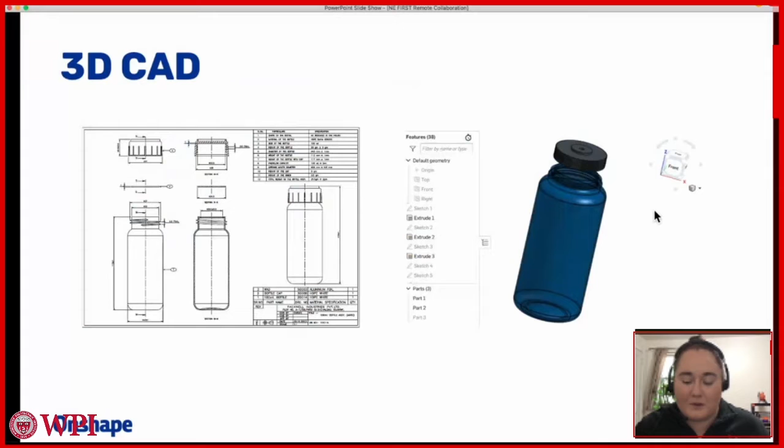So really why I think it's going to be so critical this season especially is just, it's going to really help you be more efficient with your time and your resources.

I've definitely heard this saying more than once: measure twice, cut once. So the more that you can measure and check things out and make sure it'll work before you start fabricating and cutting stock or whatever else you need to do, the better off you're going to be, because you're probably not going to have to rebuild something again later.

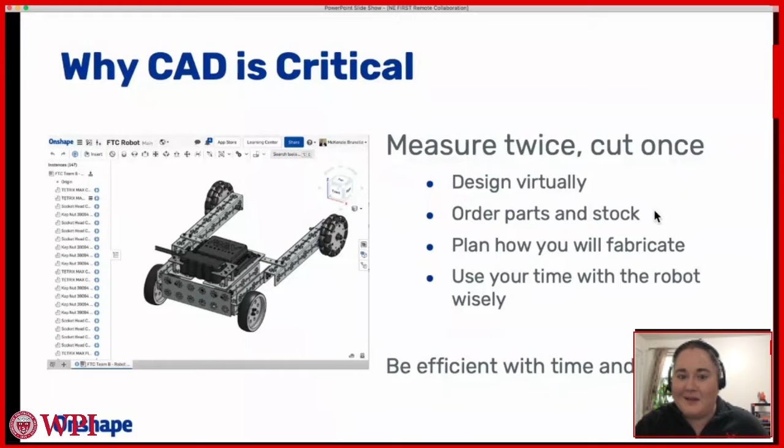So if you can design virtually, maybe if you have to start out the year where you aren't all in person together, you can be ordering the parts and stock and coming up with a plan for how you're actually going to go through your robot fabrication when the time comes. Maybe only a few people could be there in person, or if the whole team can be there, you can just be more efficient and know what you're going to do if you do some of that design up front. I think this year it's just such a different situation, that I think it's the perfect time to actually be working with CAD and start getting into those skills.

But again, I do recognize that CAD can be really difficult for a lot of teams, if not impossible, depending on what you have for hardware. Like I said, I didn't do CAD when I was on a team, because my school provided Macs to us, and I just never had the opportunity to do CAD on a computer. I just didn't have a computer that could run it.

And for our team, you're already spending so much money to travel and go all these places, to go to championship and everything else that's happening. So spending money on CAD laptops for students - maybe you get a couple kids a CAD laptop, or you have a couple computers in the lab at school or something like that. It's still not something that most people on the team can do. It's just so hard to get everyone able to do it.

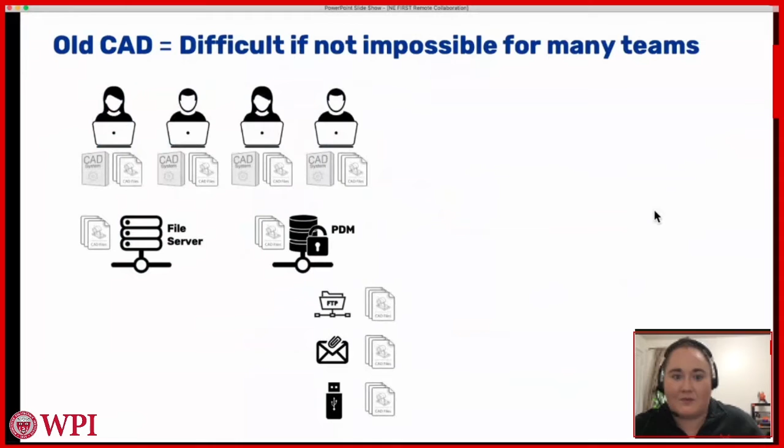And so even if you get CAD and you all have your own computer with CAD installed, and then you have all your files that you're trying to send back and forth - maybe you use GrabCAD, or Google Docs or Google Drive to send things back and forth - you still end up with all of these systems that you're trying to run and get everyone set up on, with different hardware problems.

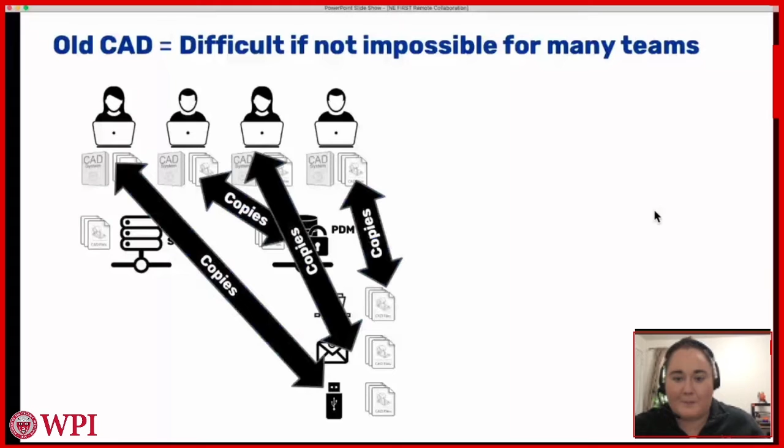If you have Chromebooks, if that's what your school gives you, you just can't do it when you're at home. And you end up, when you have files, having all of these copies everywhere. Do you have the latest copy? Or, oh, I had this really cool design last night and I redid this, but the person over here didn't account for that, so they've been designing with the initial plan. It gets kind of hindering for your team if you're just sending all these copies back and forth and trying to understand what the files are and where they are and getting people up to speed.

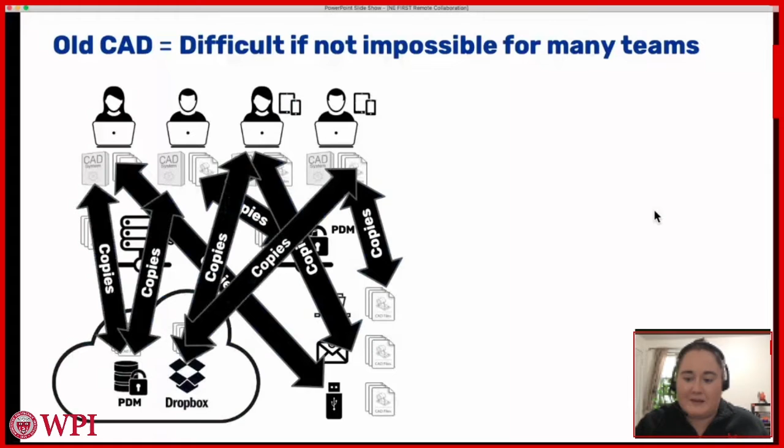You have to email someone to get your team licenses in a lot of cases. There's just all of these problems that teams can really face that make it not possible to do CAD. Going forward, Onshape really is going to make it so that more teams have access and can be doing it. So it's not just a couple kids or no one on the team doing it, but every single person can have access to what the team is doing and be collaborating remotely this year.

So I like to put up this quote. Jon Hirschtick actually initially founded SolidWorks, and then he left SolidWorks, I think about 7 or so years ago, to found Onshape. One of the things he's really proud of is that we designed Onshape to get technology out of the way of learning. We're really trying to make it so that all of those problems don't hinder your team, so this year you should be able to collaborate and work together without having to face a lot of those problems.

So what is different about Onshape that's really going to help your team this season especially? It runs in a browser, so you can use it on Chrome, Safari, or whatever else you use, not Internet Explorer or those older browsers, but any modern browser. So you can use a PC, a Mac, a Chromebook, whatever your school gives you.

So there's no download or installation. You don't have to reach out to me for a license file. You can just get started on your own.

You can also download an iPad app or a phone app, Android, whatever you want to have it on, which is really nice, especially when you're at your build space. Say you've done your CAD and then you're going to cut or manufacture something some other way. You can actually be pulling it up on your phone to double check something before you cut, or if you think there's something you might want to change, you can be looking at it on your phone or your iPad, which is really helpful.

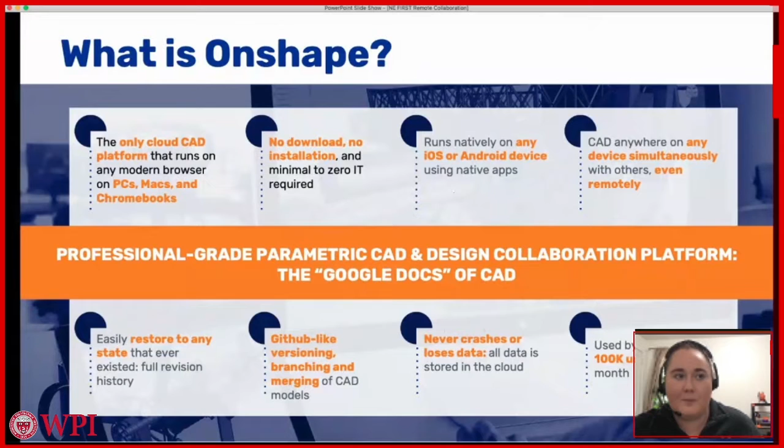And it's also really rapidly growing, so there are more and more professional users using it constantly. It's really a great skill to develop as you think about your future career.

And so now I'm going to go into Onshape to show you a few of the things that I think are most important and most critical for FIRST teams.

To get started inside of Onshape, all you have to do is go to onshape.com/education plan and sign up. If you're a student or a mentor, you can sign up here and get access instantly. It'll just send you an email to verify your account and you're ready to go. So there's no waiting on us or trying to figure things out. You can get access pretty immediately.

When you get inside of Onshape, it again feels a lot like Google Docs. You can have everything organized in folders. You can also create a team, which is a really great way to quickly share information out with everyone you need to on your team.

For your team, there's a couple things I'd recommend setting up. One is, if you do FTC or any FTC design, if you email first@ptc.com, you can get added to a team that has all of the different common FTC parts. Team 2901 created this and they've been sharing it out with everyone. Not everything from all of these manufacturers is in there, but they have a lot of different parts from a lot of the different FIRST suppliers. So this will be a really quick way to insert parts or the COTS parts that you're buying and adding to your robot.

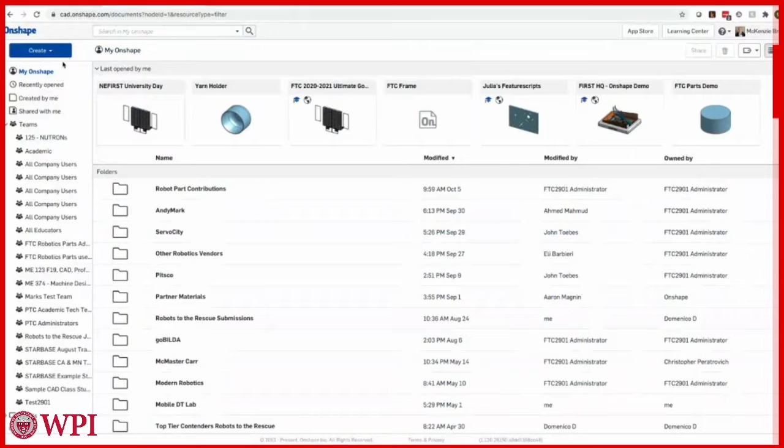So inside of Onshape, there are no files. Files are a thing of the past, we aren't using those anymore. Instead, there's what's called a document.

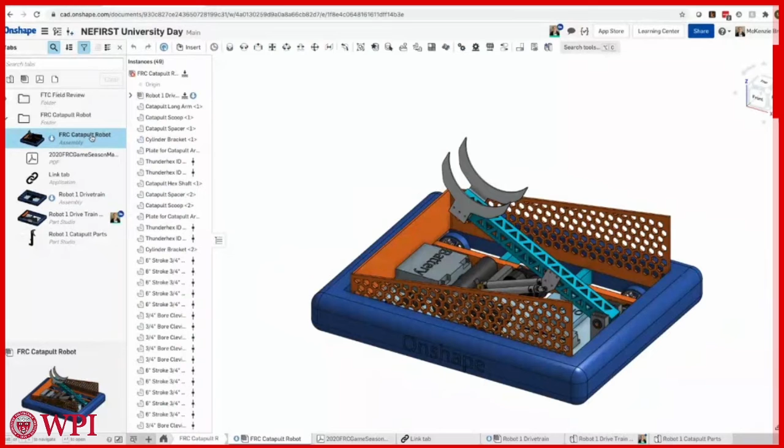Inside each document, there are a bunch of different tabs. There are tabs that are part studios, where you can make a whole bunch of different parts, and you can also have your assemblies as a tab inside one document. If you end up with a ton of tabs in one document, it can get a little slower to load, so I'd recommend no more than about 40 tabs in a document, but you can still do a lot inside of one.

And you can insert things from other documents. Say you think it's easier for your team to have a sub-team working inside of one document — you could have a document that's your full robot, and a document for the drivetrain, or however you think is easiest to organize yourself.

Here I can click share, and share to individuals on my team. Maybe I'm working on something with just a couple people before sharing with the broader team. You can make a team that is your entire team or your sub-teams, so you can share with multiple people at once and not have to remember to copy and paste everyone's emails every time.

You can also make documents public, which is something I really encourage teams to do to act as a resource and help for other teams. If you make your document public, someone could search for it later on. It's just another great way to collaborate within FIRST and to have that cooperation that we always like to see teams doing.

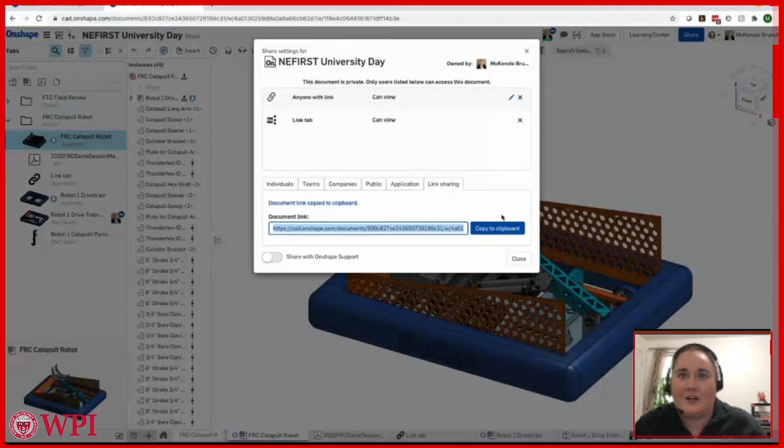You can also turn on link sharing. This is a great way if you wanted to send your CAD off to a sponsor, or to the parents on your team, or someone else you want to show — maybe your school board or your principal. You can turn on link sharing and they don't even need to make an Onshape account; they can just get that link, copy it to their clipboard, and go right to that document. They won't be able to edit it if they don't have an Onshape account, but they can still go in and view everything and see what you've been working on. It's a really great way to share your work and show the world what you've done this past season.

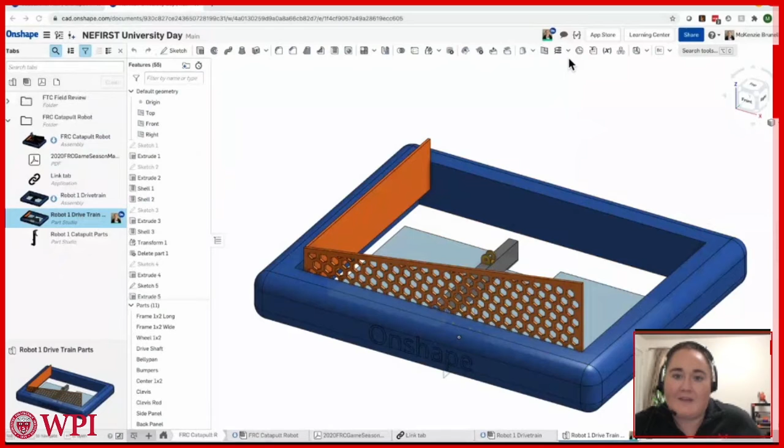Another great feature, especially for this season, is for when you're working with multiple people. You can see that I am signed into this document twice, and you can see my face up there. If you have more than one person working on CAD at the same time, maybe you want to do a design review or just talk about the CAD, work on it, or see what they're doing — maybe you're a mentor checking out what others on your team are doing — you can double click on their picture, name, or initials up here.

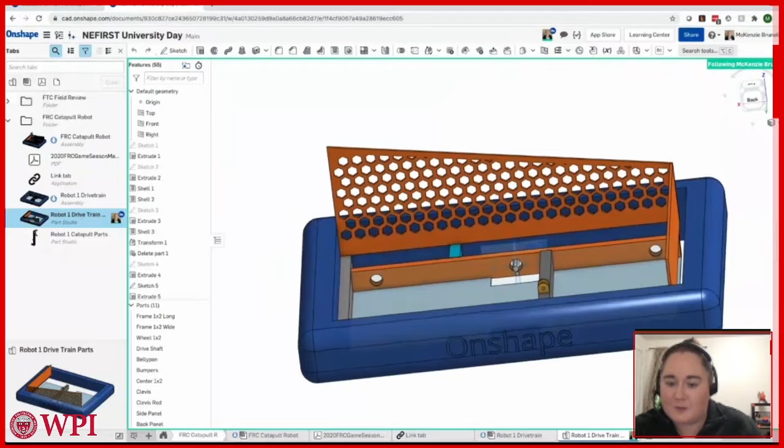So I'm going to move the model on the bottom screen, and as the other person is doing work, you can actually see what they're doing and be in follow mode. If I want to zoom in on something and see what's going on, I can do that and be following along with what that person's doing. It's a really great way to work together and collaborate.

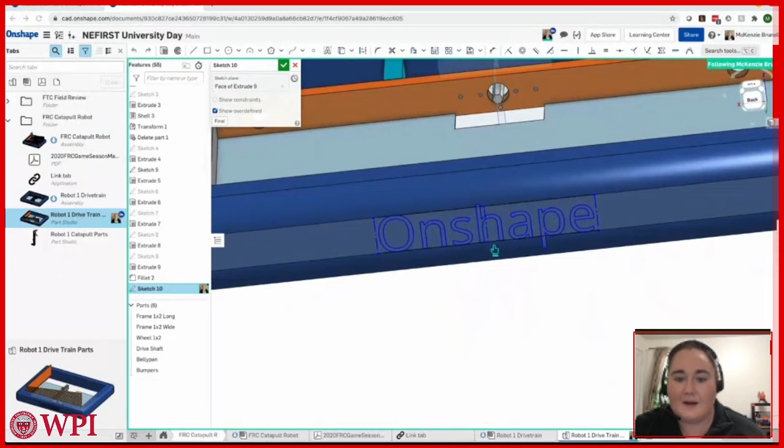If I'm working on a sketch, let me see — I can edit this sketch, and then I can see what that person is doing as they're making those edits. It's a really great way to work remotely when you can't be in the same room seeing what someone's doing.

Comments are also another great feature that are going to be really critical for teams this year. If you click on the comments button up here, maybe I wanted to tag myself to review something, or if you want to ask a mentor, can you look this over before we actually fabricate it?

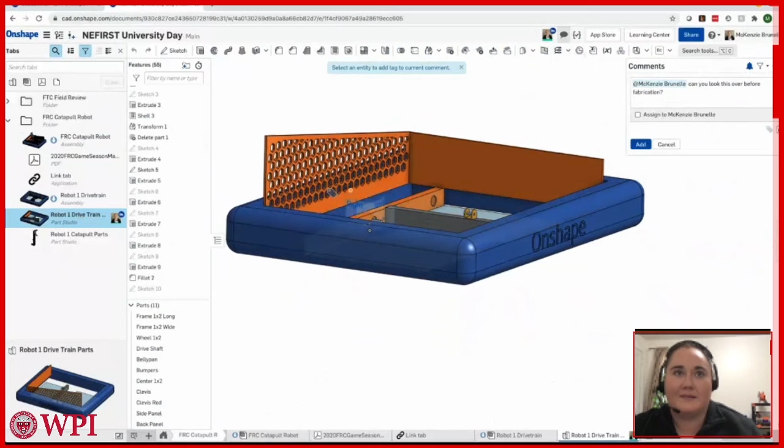So I can actually also tag which part I'm talking about, because that's kind of a broad thing to say. Maybe I want them to look over this part right here. So I've added that little tag there, and I can add the comment.

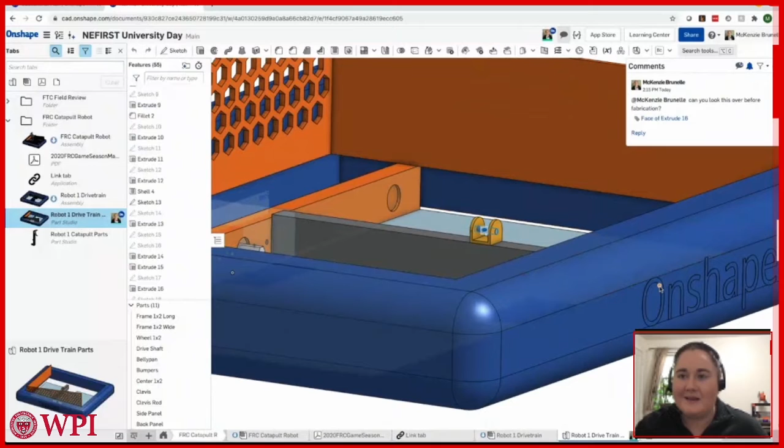And if you're like me and have Onshape installed on your phone or your tablet or wherever else, you'll get a whole bunch of notifications there too. So maybe if you're walking around the build space or somewhere else, you can take a quick look on your phone and see, oh hey, I got this notification. Maybe I should check out what they're doing. It can be a lot more mobile when you're actually working and doing design that way.

So again, it's easier to see what people are talking about if you aren't doing things at the same time. If we aren't having the traditional meetings like teams tend to do, it's going to be really important to have these other ways of communicating and working together. Comments are going to be a really helpful way this season to be talking with other people on your team and letting them know what you're doing.

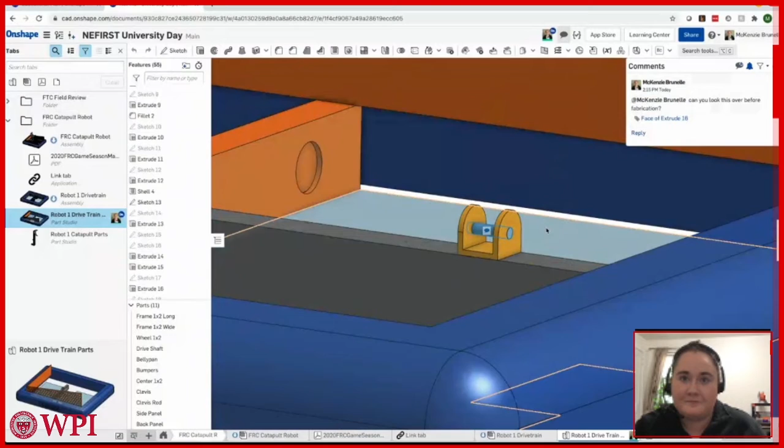Another thing that's really helpful as you go through is you don't just have to have parts and assemblies inside of your Onshape document. You can also upload PDFs. In this example, I put in the game manual. So if you wanted to have the game manual uploaded, you could do that, so you could be quickly referring to it instead of having to go find it somewhere else. You can just stick it right inside of your Onshape document.

You can also use some external applications. One that I absolutely recommend getting is the link tab application. It's completely free, so you can have a tab in your Onshape document that is a link.

Here I put in a Google Doc as my link tab. So maybe if you wanted to take your notes on your design reviews or whatever else, you can actually be putting a Google Doc right inside of Onshape and be making edits to it as you go along. You can be adding things here and really working collaboratively, knowing what's happening without having to be in the same space.

Especially for FTC, this is a pretty critical and really interesting way to keep your engineering notebook together. You don't have to remember to keep going and finding that Google Doc, just put it right inside of your CAD, so as you're doing your design, you can be taking those notes and having that right there.

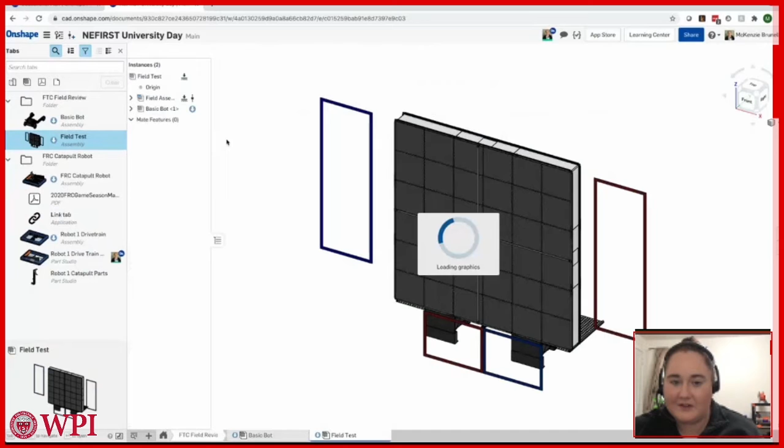So that's another pretty critical part. The other thing I'd like to point out, here's my little FTC robot. This year, a lot of us may not get to see the FTC field or maybe even any fields in person.

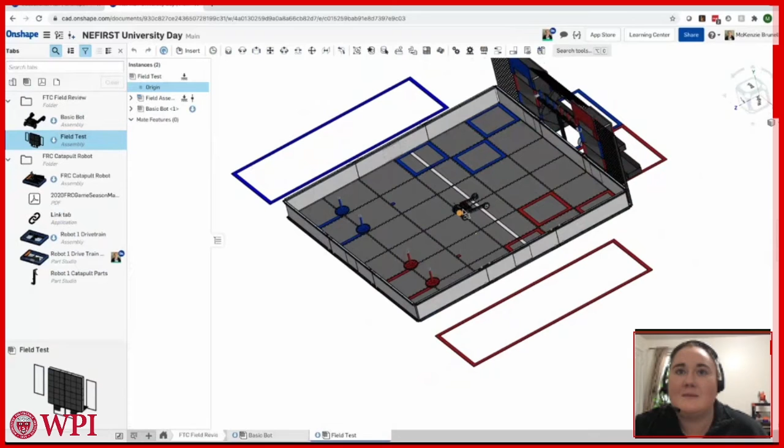So what we can do here is actually take the CAD of the field and insert your robot on top of that CAD or that model. If you have the assembly of the field inserted, you can then insert your robot assembly on top of it. So maybe in this year's case, I want to move my robot over. Just slide it around, maybe move my robot over to wobble goals.

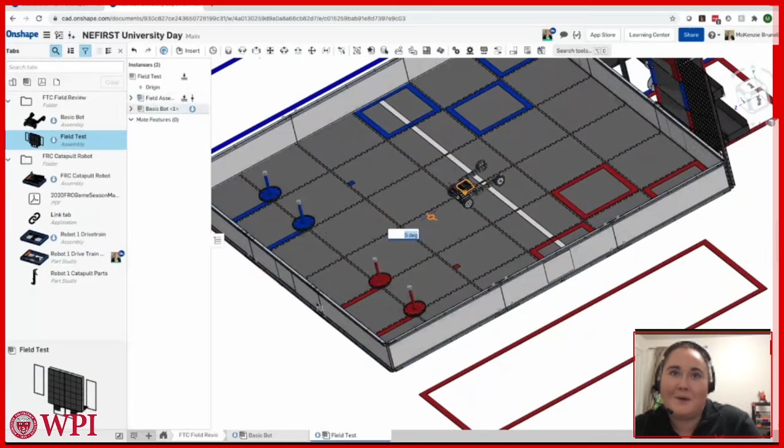Just helps if I was clicking the right buttons as I'm doing this - it's harder to use the larger mouse. If I want to move my robot over toward the wobble goal or something like that, I could do that just to see if things are lining up and be measuring and checking that out.

There are a lot of great features I can show too as you want to insert parts. Say you wanted to insert something from those kit of parts, you can go to other documents and find FTC robotics parts users, quickly adding parts from major suppliers that you'll be using.

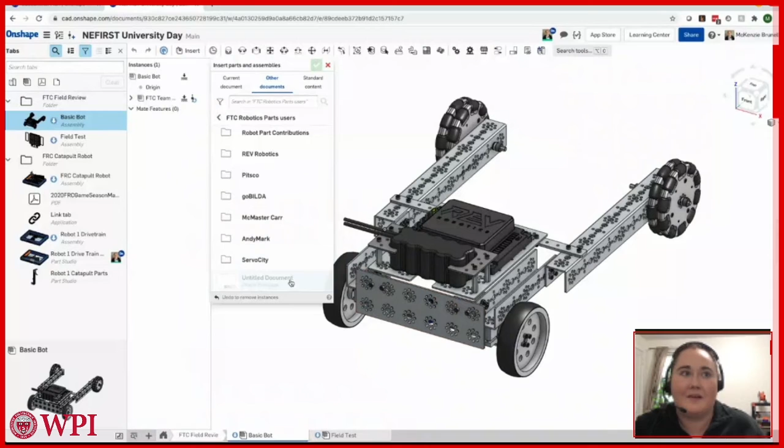This year is going to be a very different season, a different type of CAD and different way of running your team, but this is going to be a really fast way to get everything together. What's also useful, if you're doing your design ahead of time, Onshape has a really great way of building out the bill of materials for you.

So as you're designing and using a lot of those supplier parts, it'll be a really fast way to go in and find and add, go and buy the things that you've designed with. So you can make sure to have those all ready for you, ready to go as you start your season. It's going to be really helpful to do as much of this as you can remotely and figure it out, that way you aren't wasting precious time you may get in your build space.

So I also briefly mentioned the App Store. I'll go over there quickly and show you some of the interesting apps that are most useful to FIRST teams.

Reality Server allows you to do some really cool rendering of your robot. So if you wanted to make something look more realistic, if you wanted to put something on a pit display, or sponsor letters or something else, you can use this rendering app and you get 2 free hours a month. That's typically enough, once your robot is done, to make those really cool renderings of your robot.

For CAM, there's some different integrators and connectors here. Kiri:Moto is completely free, so if you need to do any CAM, you can be doing that right inside of Onshape with Kiri:Moto. And then there's also the utilities link tab, which is super useful if you want to do some Google Docs or other things inside of your Onshape document.

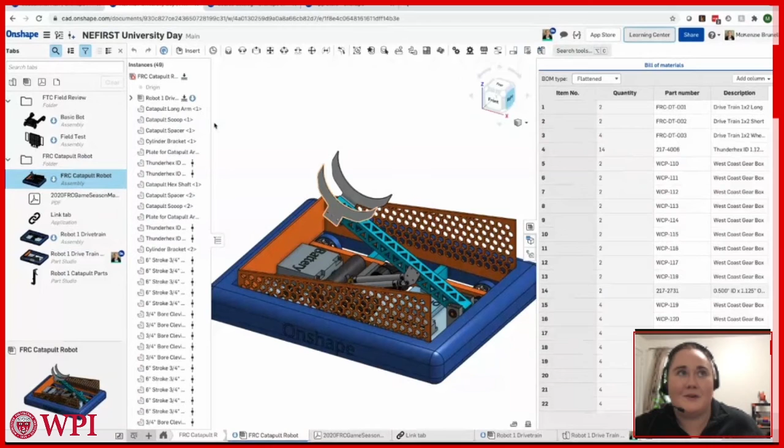So that's pretty much the big key features that I think are going to be important for teams collaborating remotely this season. There's a lot that you can do to help each other out and work remotely. And again, I think this is just so important to teams that haven't been able to use CAD because you haven't had the hardware. It's just so important to me that everyone be able to do it if they want to and have the opportunity regardless of what device you have. So you can be using this on your Chromebook or your Mac or whatever else, and everyone on the team can be working together and learning CAD for one of the first times this season.

Looks like there are a few questions. Oh yep, so the first question was, do you have any tutorials we can use to teach my team members?

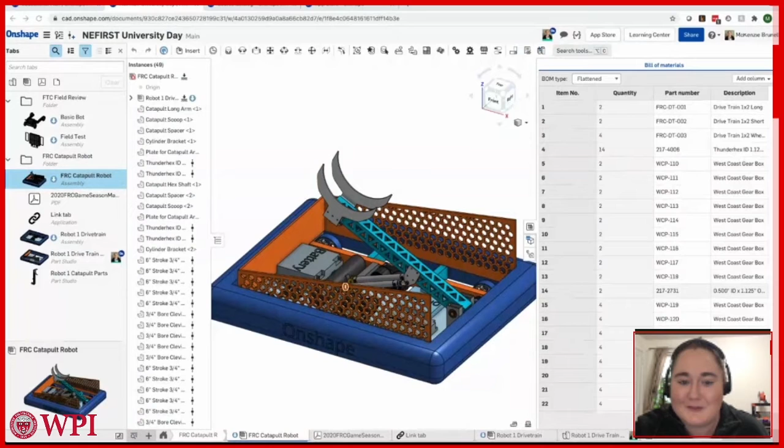Something else I'll also point out, if you go to onshape.com/edu/FRC, there's this great guide that I put together with some other people on my team talking about getting started with Onshape for FIRST teams. This walks you right through from getting an account, brings you to that free account page, getting oriented, there's the 2 different learning pathways that I mentioned, the Introduction to CAD learning pathway and the Onshape Fundamentals pathway. There's an article about the best ways to get started, from importing CAD data from other CAD systems, how you want to actually set up your team inside of Onshape when you make the team, like what permissions you should give everyone, those types of things.

And then I mentioned briefly the 2 sets of kit of parts. There's one for FRC teams, which is the MKCAD library. And then for FTC teams, 2901 built this beautiful library as well. So email first@ptc.com to get access to that library.

But the MKCAD one, those are a bunch of different documents that you can just find in the public documents. You don't need to be given access to any of those. And then this past spring, we actually did a design competition for FIRST teams. As part of that, we did a whole bunch of different webinars, and some of these have some really great information too about getting started with Onshape, working with the kit of parts, migrating from other CAD systems, and that sort of collaboration piece of things.

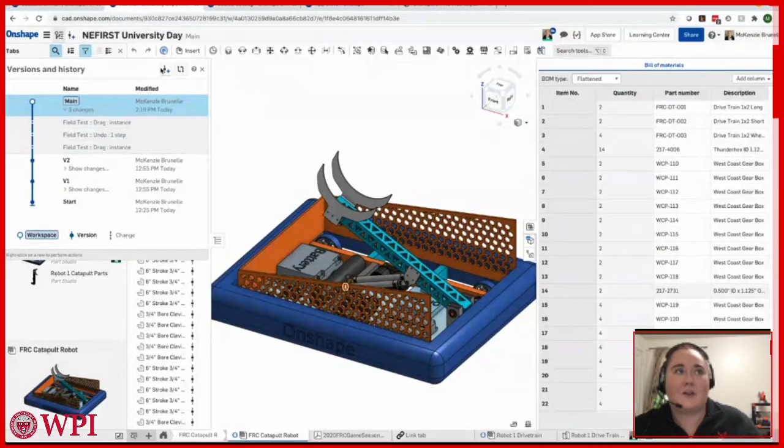Oh, I did forget to mention version management. So inside of every Onshape document, you can see the versions and history, so you can see everything that's been done. Maybe you were wondering, what did my team member do last night? You can look here. You can create new versions as you go along, and then you can also make branches.

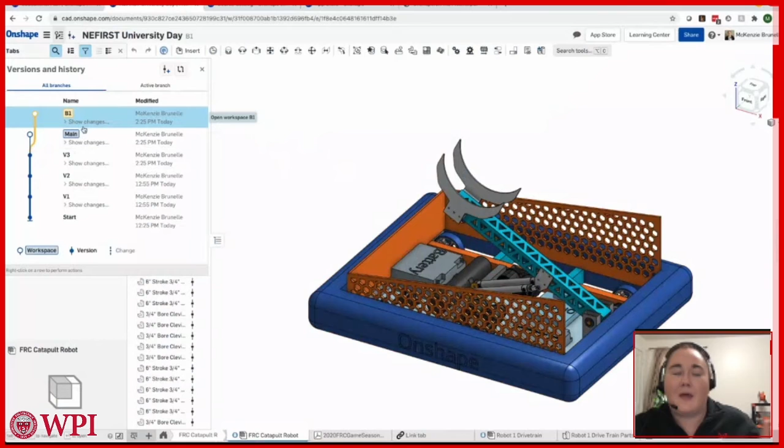So I can branch to create a workspace and be working inside of that branch instead of in the main workspace, if I wanted to try out something different on the catapult mechanism. Maybe I wanted to see if I could do a different claw piece. I could actually be making a different branch so that I'm not messing up what my other teammates are doing, trying something out, and then merging those two together as I'm ready to do so.

And then there's just a bunch of other resources if your team may need them, but this is a great document just for teams to kind of go through and get started.

And then there's another question about how powerful of a computer do I need to run Onshape. Can it run on a Mac or a computer without a dedicated graphics card? It definitely can run on a Mac. It doesn't really need anything too powerful. If you have an ultra old Chromebook, you may have some trouble with it.

The way to check if you can use it is go to cad.onshape.com/check, and that will actually run a check of your system and tell you if it's compatible. Sometimes people have done some stuff with their WebGL that may kind of throw Onshape off, and so this will tell you what you need to fix if you're having some issues.

There's a question about professional certification in Onshape, and that just recently was launched. That's the higher level professional certification. We are currently working on a student certification. I don't know exactly when that's going to come out. I believe by the end of this school year, but I'm not positive. So I would keep an eye out on it, but we are actively working on something like that.

There's a question about if I want to move to Onshape this season, is there an easy way to bring in last year's CAD model from another software like SolidWorks. There definitely is. You can import and export with Onshape. So when I add something I can import — I should have had some other CAD files ready to go — but yeah, you can import.

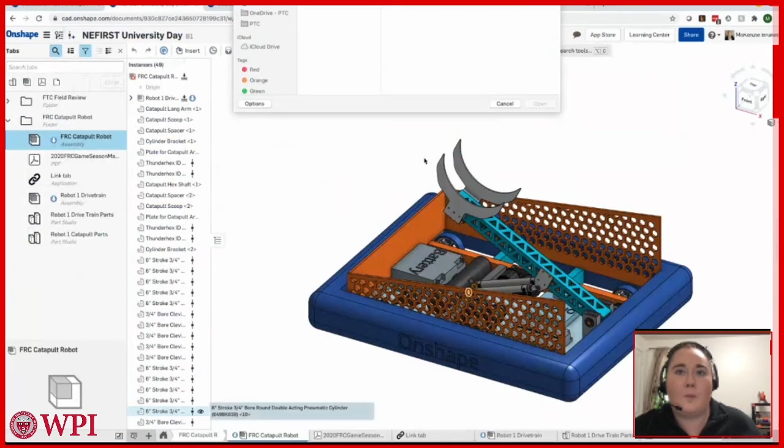There's a whole bunch of different file formats that we will accept. Let me go to our help center. You can go through here and this will tell you all of the different files that can be imported. This is going through step by step, and there's so many different types of CAD files and other files that can be imported into Onshape. So SolidWorks definitely can.

The one thing this will also go through is working with those files. Sometimes, pretty frequently, the mates are different from one CAD format to another, and so you may have to add some mates in when you're assembling. So say, for instance, if you're importing a motor and you want to make sure it has that rotational motion, you may need to add that inside of Onshape. It might not get imported correctly, but that's about as much as you would probably have to do.

For running Onshape in a classroom, we actually have a couple of specific resources for educators about getting Onshape set up for the classroom. If you email first@ptc.com, I can send you those specific documents. We have some different exercises. We also have an instructor community on our forum, and that's a great place to find resources. One of my colleagues every week has been putting up different example lesson plans. So there's a ton of stuff there for running Onshape in a classroom.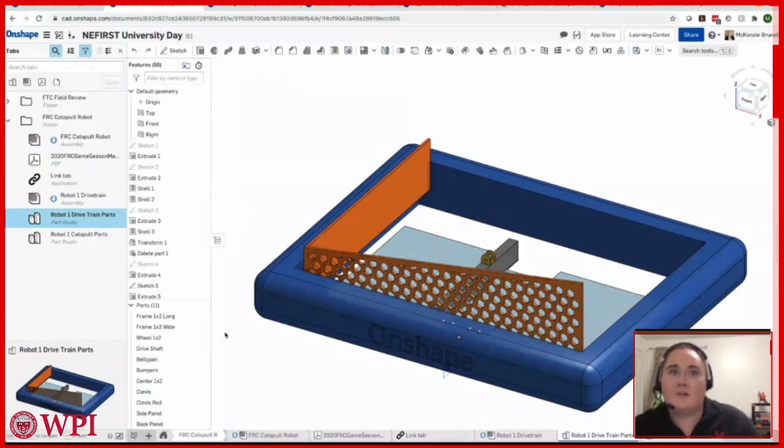So say, for example, I want to make my belly pan smaller—I guess the belly pan isn't a good example, but say I wanted to make the side of my drivetrain smaller, I could make it so my bumpers also became smaller because they're interrelated inside of one part studio. Instead of making a change and then having to go update all of the other part files, this allows you to more quickly make changes across multiple parts and have them all related in a way that helps your team out greatly.

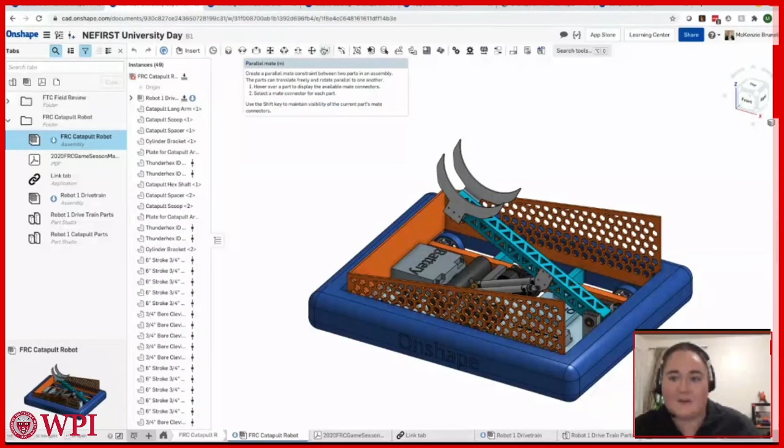One thing I meant to mention: when you're assembling something, mates inside of Onshape are usually the thing I get the most pushback on, that they feel different from SolidWorks. Mates are almost a more simplified version—you have fewer clicks to get the same result. You can still have all of that basic motion inside of the robot, so I can be moving my catapult, spinning my wheels, and see how the robot would move. But again, it's just a more simplified way that takes fewer clicks to get that motion.

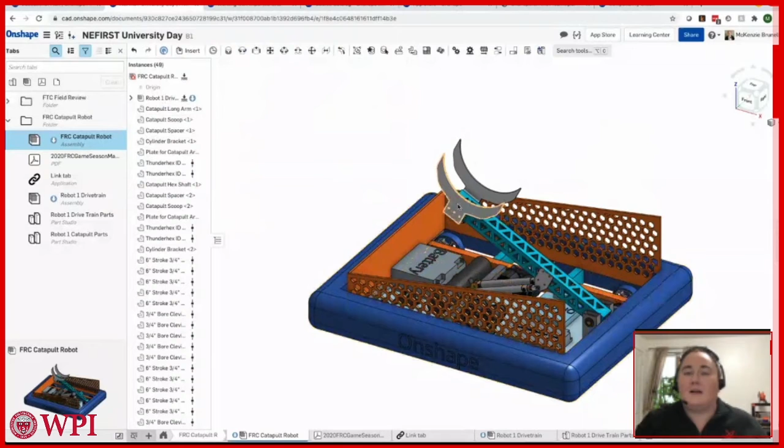The next question was, are there any practical limits to the number of people who can be editing one file? How does CADing work with someone else in the same file? The big thing is it's just like a Google Doc. If you're typing with someone else and trying to both type in the exact same sentence, it can be really annoying—same if you're working on the very same measurement or the same part of a sketch. But if you're working on an assembly, maybe I'm editing this part of the claw while someone adds something to the drivetrain, you shouldn't get in each other's way at all. You're working in the same space, but not in the same exact spot.

Another question I get a lot is, is there a limit to how many people can be working in the document? Not that I've seen. There are teams that will have 20 people all in there looking to do a review, or maybe you're working in different tabs. So theoretically, you could have an unlimited number of people in there, but if you get too many trying to do the same thing, it can be cumbersome.

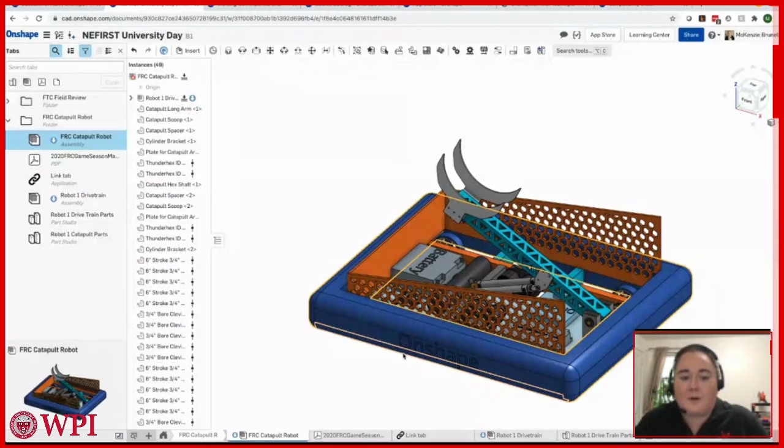The next question: can you make and print part drawings? Yes, so you can make a drawing inside of Onshape. That can be another tab, so I'll stick with this format. You can make drawings just like you would in any other CAD tool.

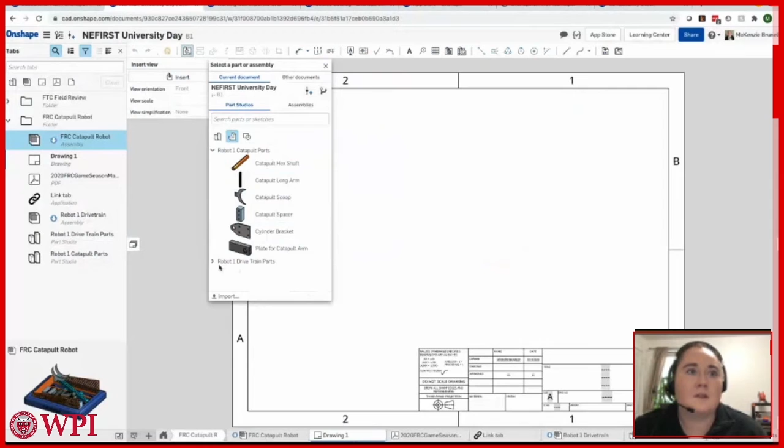It's going to take a second to load the drawing. You can insert your different parts. So if I want to look at my catapult parts, maybe I'll do a cooler part than that. I'll do my side panel. I can insert the different views of my side panel as I want for the drawing, and you can have those for manufacturing. With drawings and with parts too, you can export.

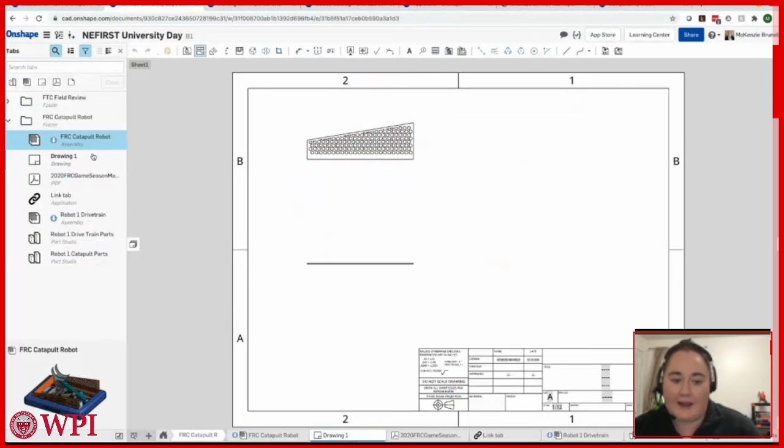I could export the drawing as a PDF if I wanted to for printing, or there are a couple other file formats that may be helpful if you need a DWG. You can also be exporting those.

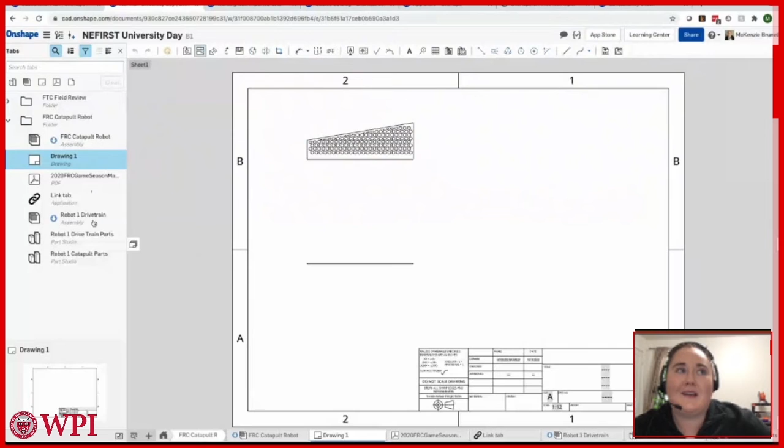The next question is pretty related. When you look at your parts, yes, you can also export STL files for 3D printing. Let's say I'll take this piece of 1x2. I can export it in a whole bunch of different formats - STEP, STL, like I mentioned, there is some integrated CAM if you wanted to do that as well, to be outputting some G code if you needed that.

For 3D printing software, there isn't any specific 3D printing software. I think Kiri:Moto you can also use for some 3D printing, but typically you would just export the STL and use that in your 3D printing software. I know most printers are pretty specific about what they want to work with anyway, so at this point it just makes sense to do that export and use it in whatever you need to.

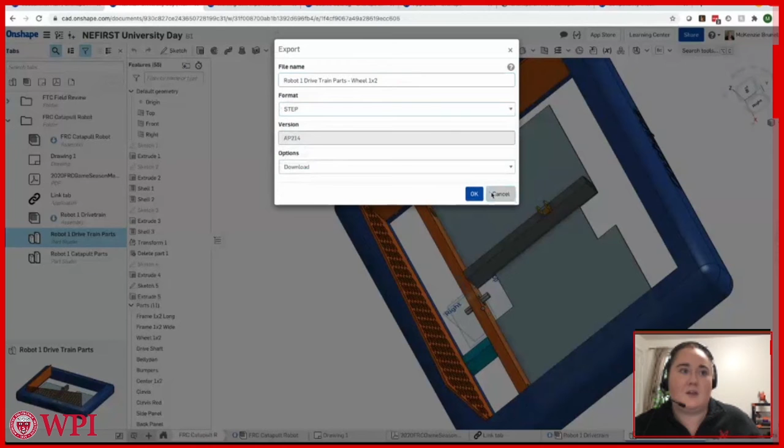So you can export parts or assemblies as you need to. When you have this part studio with a whole bunch of parts listed, you can just come over here and find the part you need and export one by one.

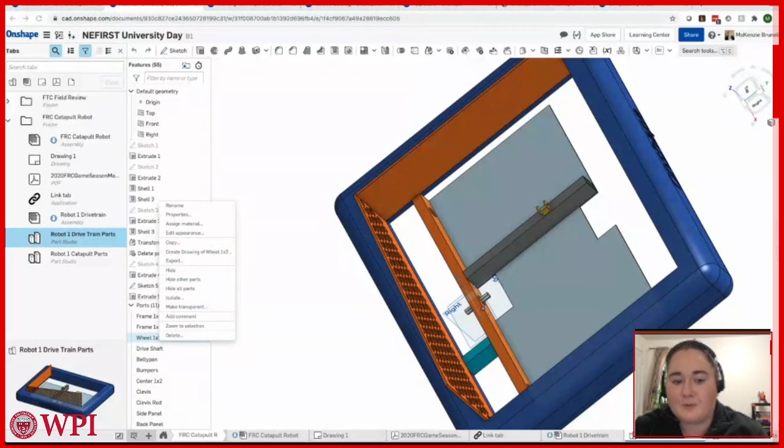For a long time, I couldn't figure out how to add custom mass properties, such as the weight of a motor. Yes, you can definitely do that inside of Onshape. So again, I'll take my 1x2 right here. You can assign a material to it. Let's say I want it to be aluminum.

I can select that material, or a custom material, whatever makes sense to have. And because I already have assigned that there, that's why it didn't let me add it. You can also edit the appearance if you want, so I can make it a fun color. Let's say I want to make my 1x2 purple instead. I can be assigning colors.

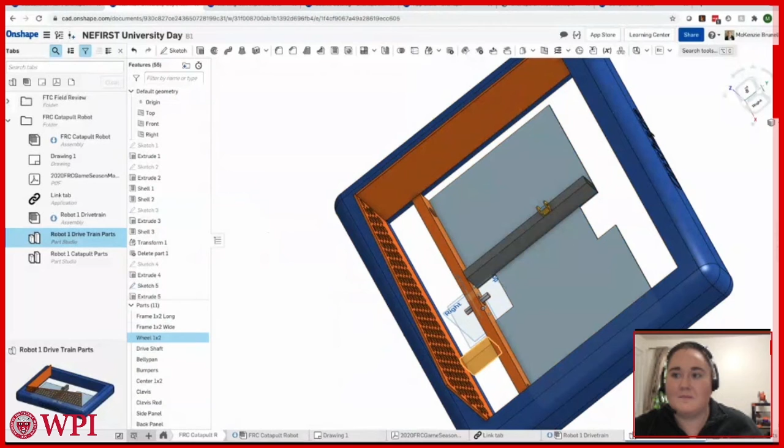Once you have those properties assigned, in the bottom right corner you can see the mass properties. So now I can see the mass, volume, and everything else of my part.

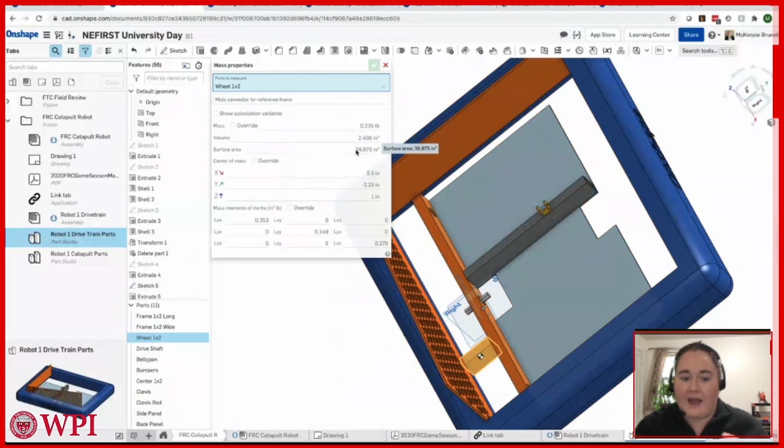When you're importing, you can also be doing that as well, I believe. So if you're importing a motor, I think you can do that. I know all the parts that 2901 did, they are very specific about making sure that all of those properties were present and that everything acts the way that you would expect it to. So if you're using one of the motors from that library, they made sure that all of those motors have the correct motion, or bearings or things like that.

Something else I'll show that reminded me, when you're using those parts from 2901. Let's go to Servo City's structural components. When you're using things like channel, you can actually make it so that it's configurable. When I go to insert it, I know Servo City has channel and they sell it in all these different lengths, so I can just select the length of channel that I want to use. Let's say I go with something 21 inches.

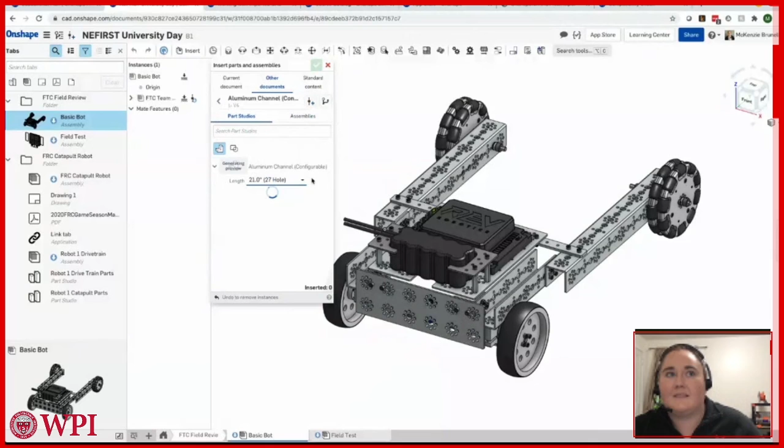I can then insert it at that length, and then if I wanted to, I could change it later on as I'm going along. So you can have those configurable parts, or same thing with inside of your robot. Maybe you have a couple different configurations. You can actually make those configurations in CAD.

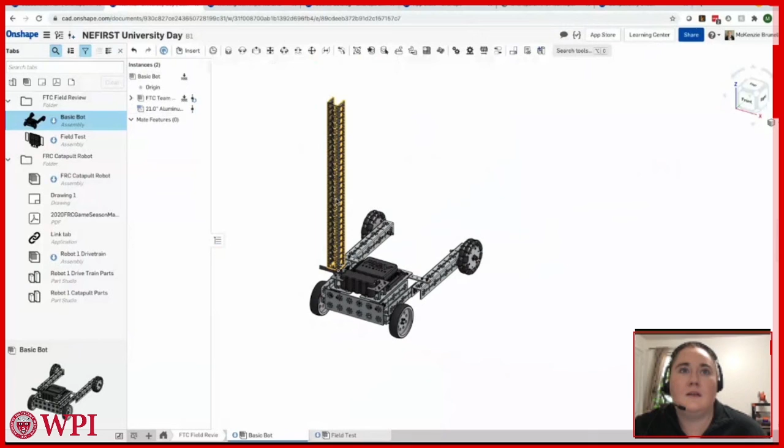So you could click back and forth between the two and see what those look like. And so here you can see I have my long channel, and I could right click it and change that configuration if I wanted to, and go back to a different length if, as I was making my design, I realized, oh wait, that was way too long. It's more than 18 inches, so it's not going to fit inside of my starting configuration. I can go back and make those changes as needed.

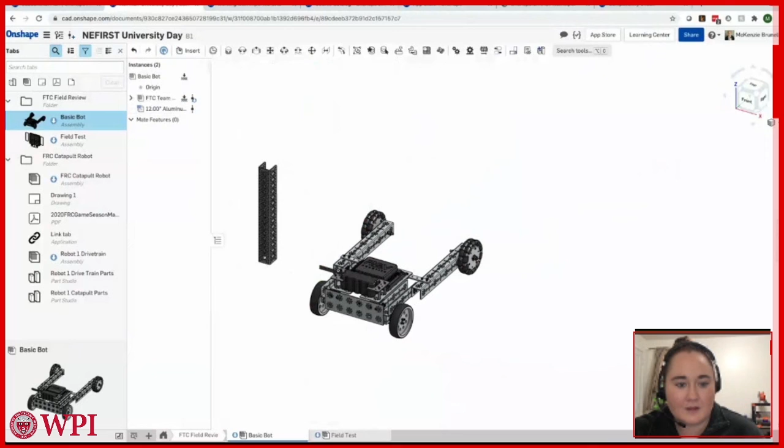And so that'll be pretty helpful too. And I think something good to show would be from that design competition, if you search for robots to the rescue,

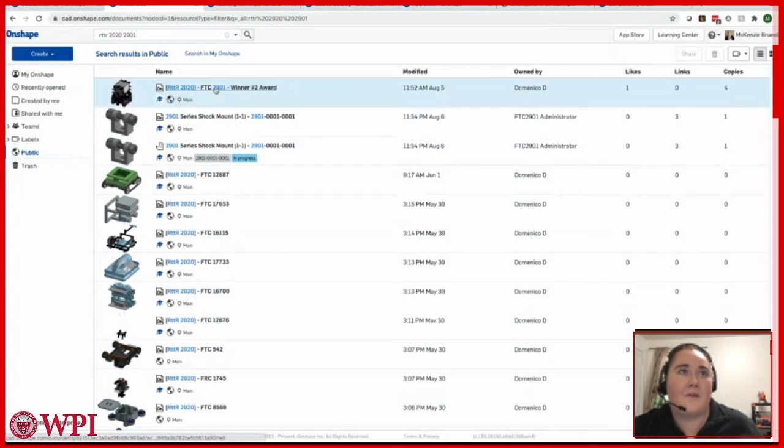you can see all those robots that were submitted in our design competition this spring. And there were some really good ones that did a great job of, let's search that specific one. They did a really good job of using configurations in Onshape to show the judges what the different configurations of the robot would be. And especially this year, we don't know what remote judging is going to look like. So the more that you can set yourself up to show judges by making those Google Docs or making these configurations, I think that'll be really helpful to set yourself up to have everything you need when the time comes.

This one has a lot of parts, so it can take a little bit to load.

And then there's another question too that I'll answer while this one starts to load, which is, are there any links between Onshape and Creo or other PTC software? Can some of my team use Creo and others use Onshape?

So yes, you could do that. PTC acquired Onshape in November of last year, and so they're completely separate CAD systems, and they will always be separate CAD systems. There are going to be features that Onshape has that Creo says, hey, that's great, we should add that too. And Creo may have some more advanced simulation and things like that, or some other features that Onshape doesn't have yet, that will kind of go back and forth between the two.

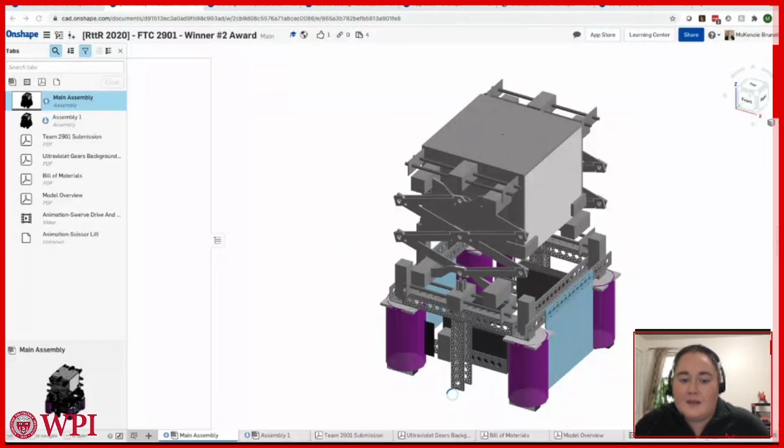But right now, the biggest thing is Creo acts a lot like any other CAD software to Onshape, where you can import and export files between the two formats. But whenever you're doing that with any CAD software, you can lose a little bit. So you may have to recreate some of those mates or other features as you're going along. So you could do that and have some people using Creo and others using Onshape, but you are going to have to do double work later on if you're going back and forth too much.

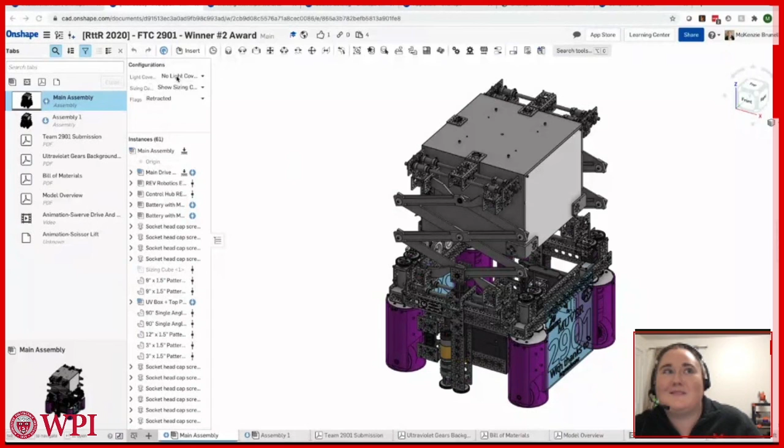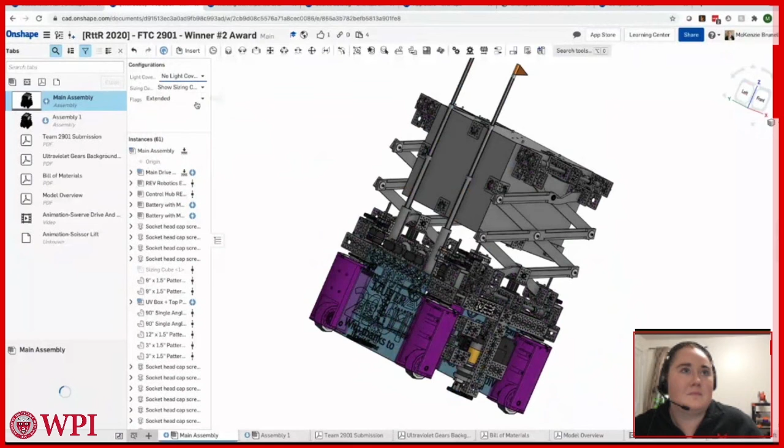So as it's loaded, you can see here there's configurations in the top left. For example, they have a couple of flags on the top, and we can make those flags extended as one of the configurations. So I can make those flags extend. If I want to see the light covered or uncovered, I can do that as well. It's taking a minute to catch up to me, but

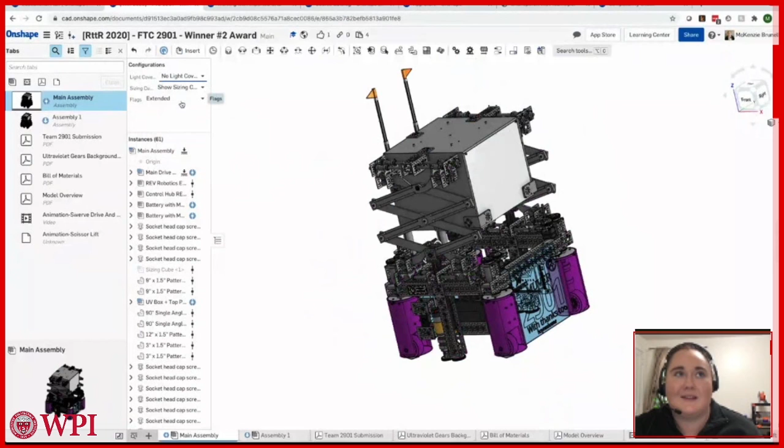again, if your robot has a starting configuration that's smaller, and then it expands to a larger configuration, you can absolutely be showing those configurations inside of the CAD. So it's a great way to have all of that easily accessible to your team.